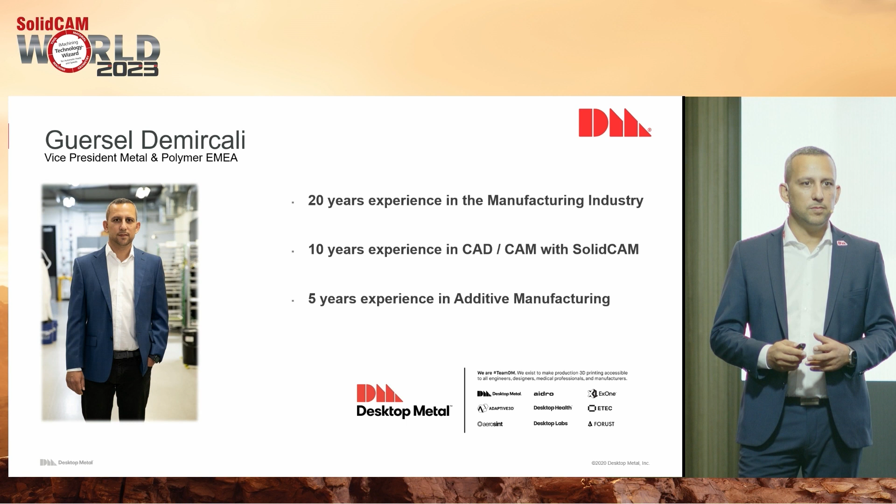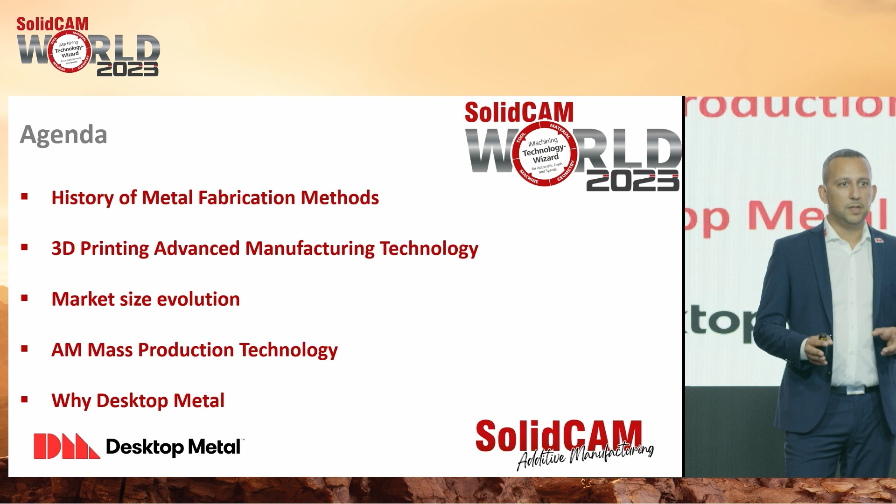We will talk today in my agenda about the history of metal fabrication methods. We will talk about 3D printing, advanced manufacturing technologies, and market size evolution. AM mass production is a big question mark in the market for a long, long time, and we will discuss it today. I will explain the differences we made with the new technologies of today, and why Desktop Metal - why you should choose Desktop Metal.

Let's have a look at the history, because history always tells us what happened in the past, where we are driving, and what has changed. If we look at the traditional manufacturing methods we've been using all these years, you see they stay pretty stable, and there are some similarities.

So we have the extrusion market, stamping, powder metallurgy, forging, casting, and CNC. And in the little lines below, you can see the age of these technologies. Almost all of them - the youngest one is CNC - but most of them are more than 1,000 years old. And that doesn't change.

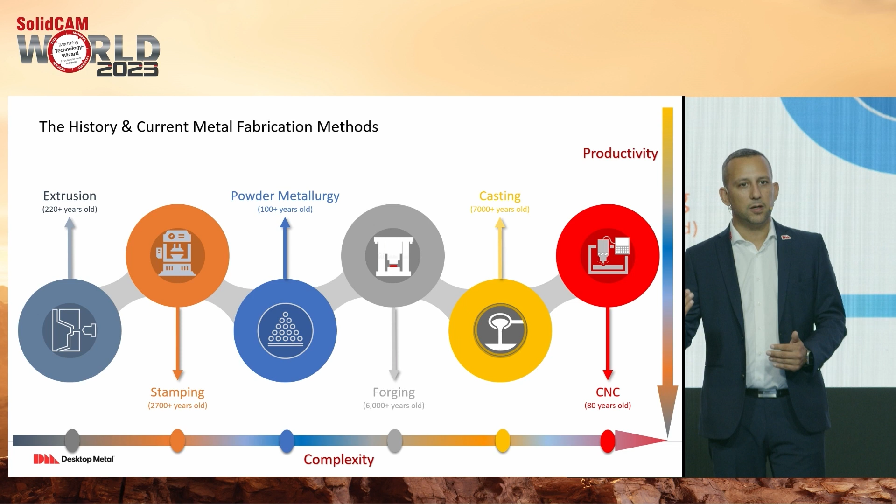The complexity defines the productivity. When you look at the complexity of your part, if it's increasing, then the productivity goes down. And there is the big question: how can we get a better effect or more output?

So a quick shout to the revolutions of industry. We had the fourth revolution, but how did we start? We had the steam technologies in the 1780s. We started to have the first mass production in 1870. And if you read these lines, you can see that every 100 years, we see a change in the industry and we get a new revolution.

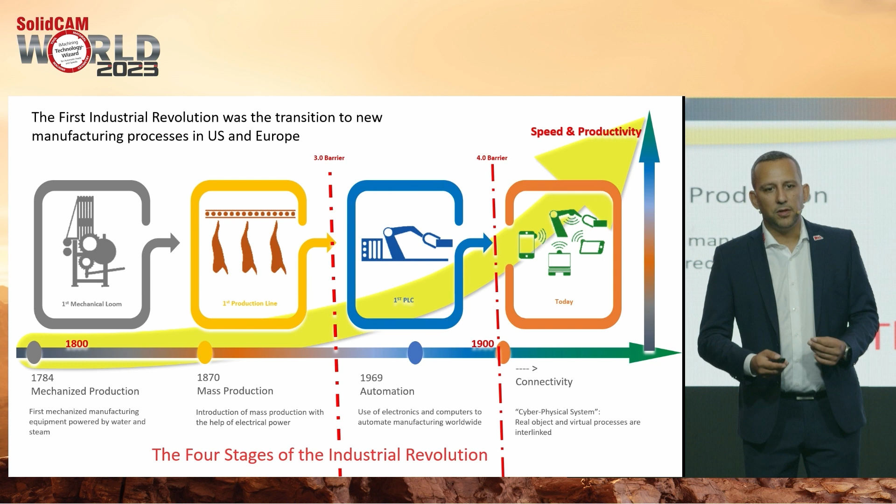Automation came in the 1970s. And today we talk all about connectivity - also private, by the way. Everybody's connected to everything, and the machines need to be connected too. So connectivity is the key in the future to fulfill the new revolution method of manufacturing.

3D printing is one of the advanced manufacturing technologies, and it is in the news every day. Why, and why was it not that successful? Why do we have different styles of machines? We will talk about some of the technologies later, but if you look at the first name of 3D printing or additive manufacturing today, it was rapid prototyping.

Rapid prototyping, because the quality of the part you could produce never fit an end-use part. You couldn't use it for fixtures or tooling. You couldn't use it for an end-use customer part because it wasn't certified and it was a weak part, almost plastic. We started with FDM and had all these technologies around until we hit the first mold and tooling.

Fixtures, we can also add to that. But the amount of parts you could produce with such a printer meant high cost investment, and at the end, low output. Not everybody could spend the money, and it doesn't make sense, because the bigger market in this world is mass production. You need to have a certain volume.

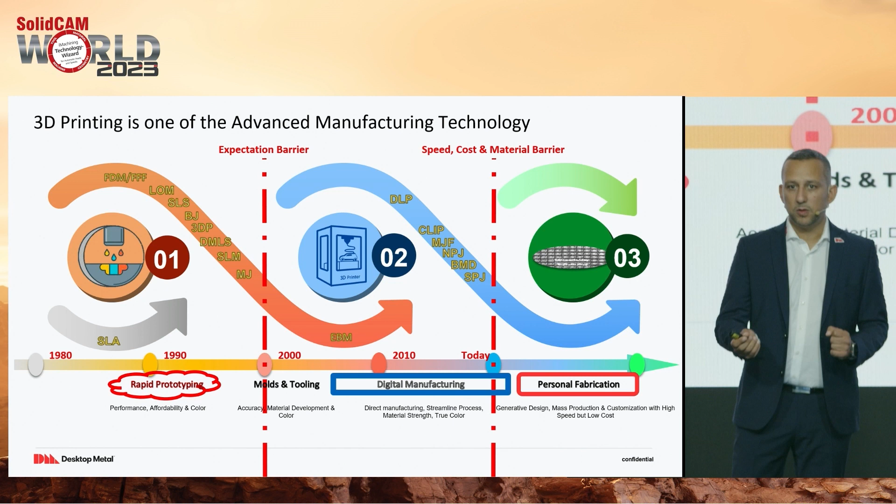After arriving at digital manufacturing, which was end-use - yeah, it was possible, but not in the right amount. So it was not for commercial use. Personal fabrication is now where we've arrived with the new technologies we can use. And I will explain today, step by step, what the difference is.

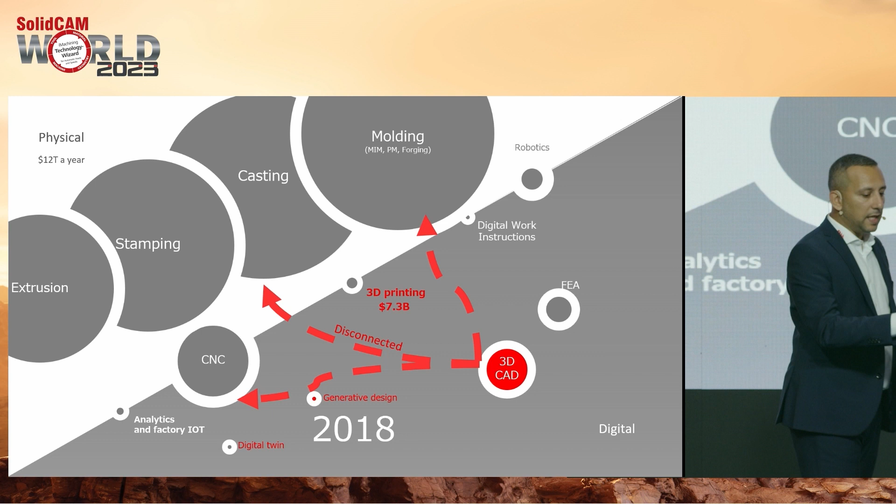And there's a little dot - 3D printing, 7.3 billion, 2018. It was one of the smallest dots here. And you see also generative design. I mean, if you watch the news today, you see a new motorcycle, you see crazy parts on it, always generative designed, very crazy structures. That is the future. Why do you see it today? Because that will be the future products.

The reason for using these technologies is the design, and you design for those technologies. Design defines the creativity, market, sustainability. But on the other side, you need to create also the right production method. Production method cares about the cost, quantity, and lead time. There is little freedom, but if you can hit the right technology, then you can fulfill both sides and have maximum freedom. Everybody wants to have maximum freedom. Like with SolidCAM, you can program any part. You don't want to have different software.

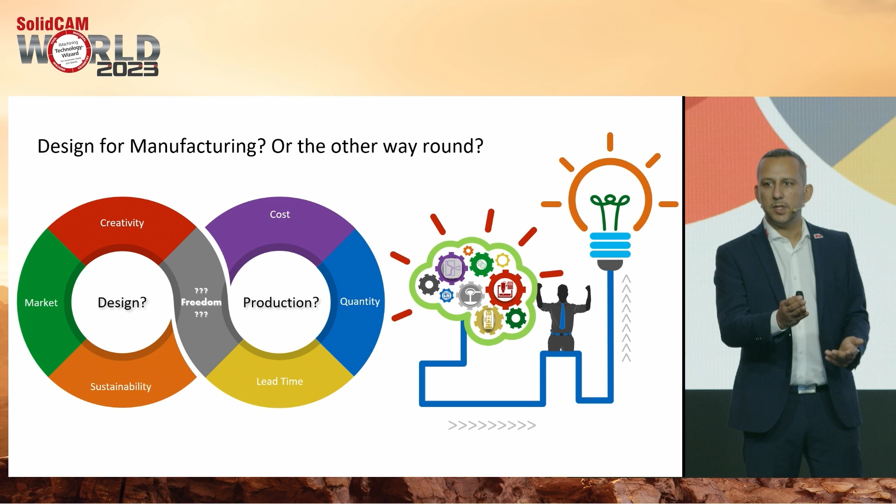When we look to the 2030 market in the future, we will see a big change. All these traditional manufacturing methods will go down. They will not disappear, they will just go down from the market size, and CNC will grow. One of the biggest reasons CNC will grow is the 3D printing market, because we can't hit the speed and a certain level of accuracy on the 3D printing side, and CNC becomes more relevant because the amount of work you do by a part is really limited. The best advantage of a CNC machine is bringing accuracy to the part, having the final finish.

Also these days we see the digital twin and generative design market growing in the same amount as we can grow. This partnership between Desktop Metal and SolidCAM started for this reason.

If you look back, the biggest exhibition in the 3D printing market is Formnext. It's one or two halls in Frankfurt. If you compare this to our favorite AMB or EMO, it's a much different size.

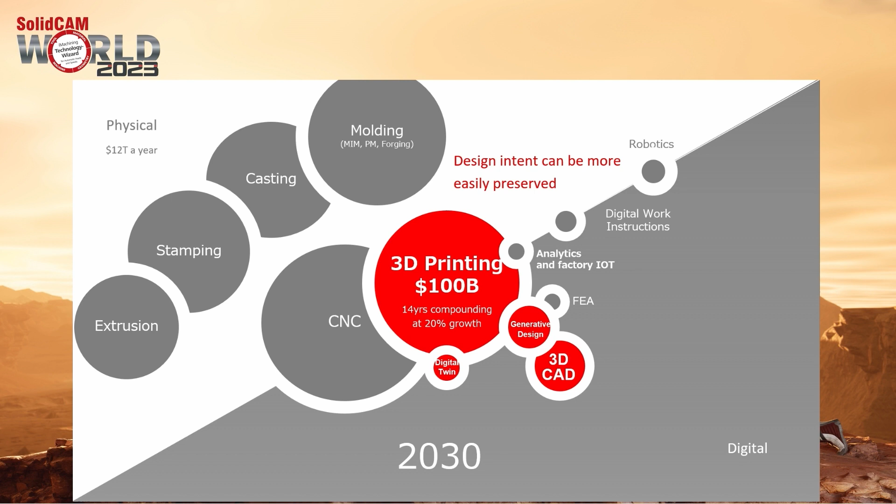When I went to my first Formnext exhibition, I saw people there coming from different markets trying to explain to me how to produce a part, coming from a CAM system and working already on machines. I couldn't understand, how can you teach me? The first three questions, he couldn't answer any.

I think the combination of CAM, CNC, and 3D is the right area where we can understand what the customer needs and we can deliver the right solution for them. Because we know, and we would never say you can just print and use it. We will always say if the accuracy allows and it's in the specs. If not, you need to CNC it.

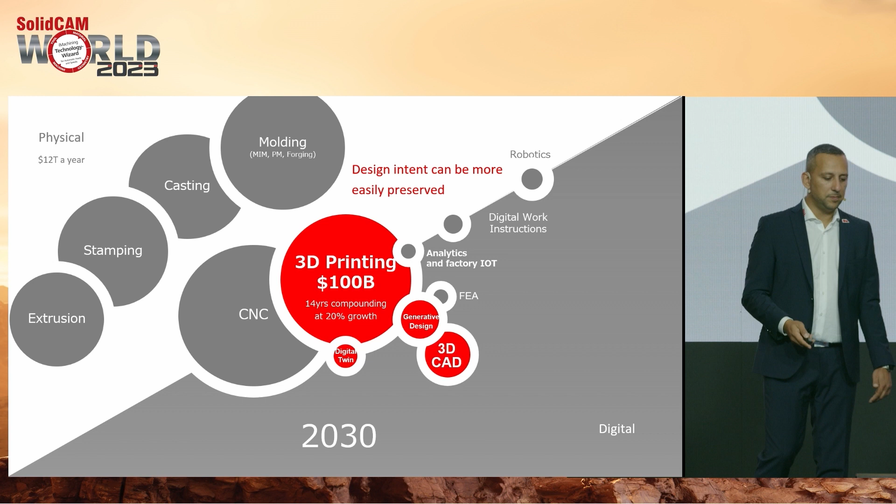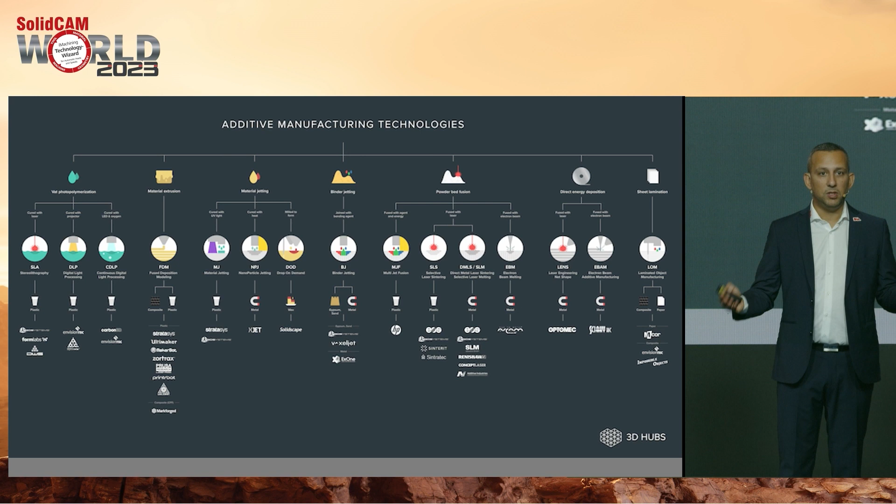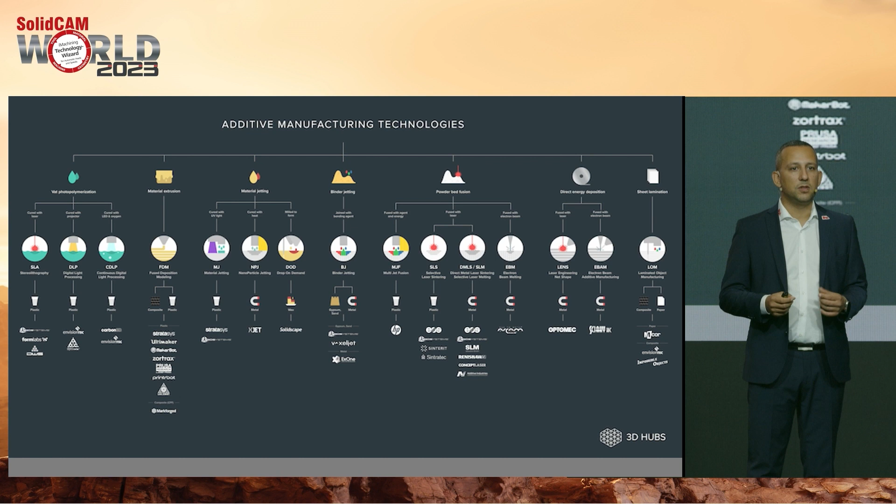When we look to the additive market, you see a lot of technologies, and I can totally understand that most people say that's too much, that's really too much. You have so many variants, and what are they doing? What is the difference? I can tell you one thing: 95% of all these technologies are always focused on a single part or low volume production, because the technology is not ready to do more, or the amount of costs you need to invest is too high at the end.

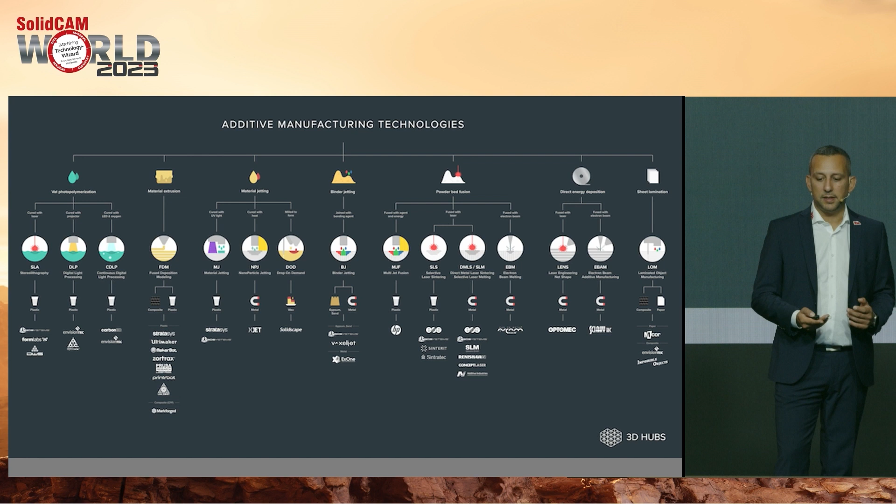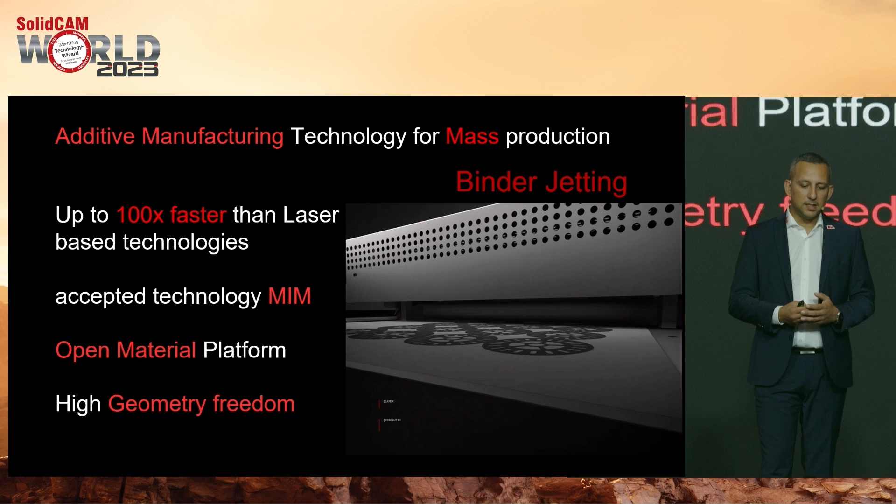The additive manufacturing technology able to do mass production is binder jetting. We are not reinventing the wheel. It's nothing different than metal injection molding. Instead of pressing some powder into a form, into a mold, we are just adding some liquids to a powder and shaping the part, then sintering it afterwards.

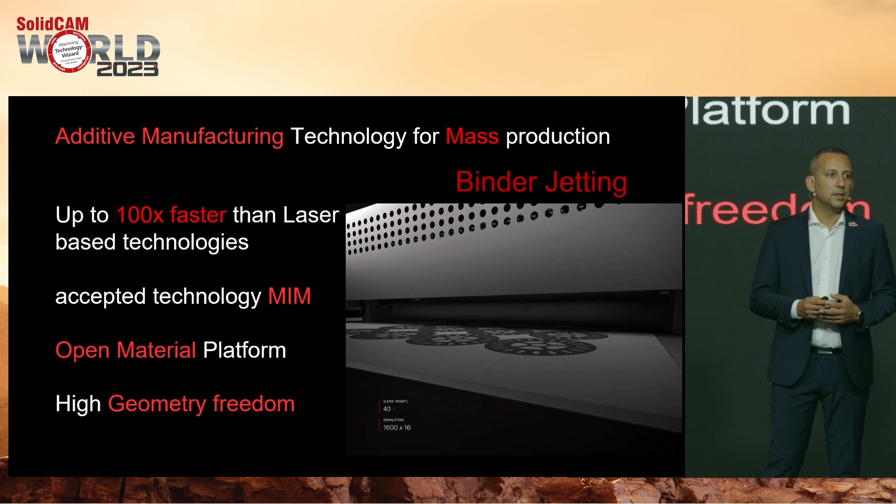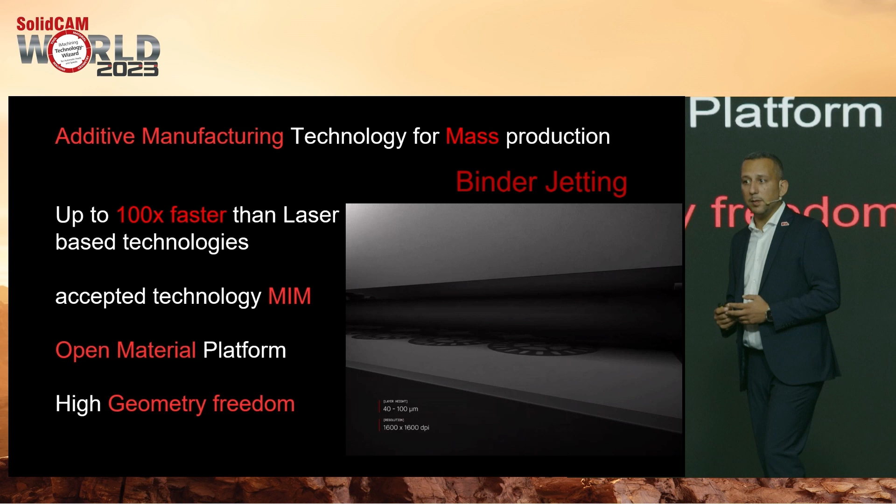Binder jetting is up to 100 times faster than the existing laser-based solutions. This is not just a marketing thing. The fastest machine Desktop Metal offers today is, in real terms, 100 times faster. The shop system we are talking about is 10 times faster. We can print 800 cc per hour. Let's talk about the details later.

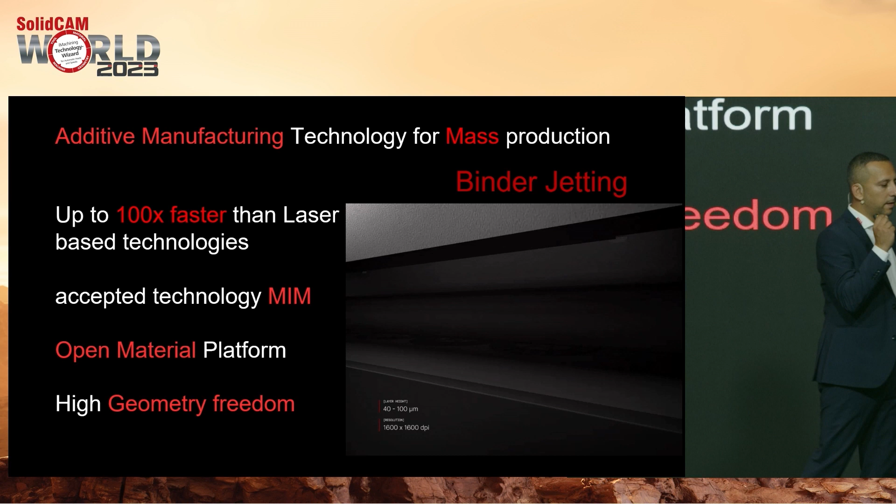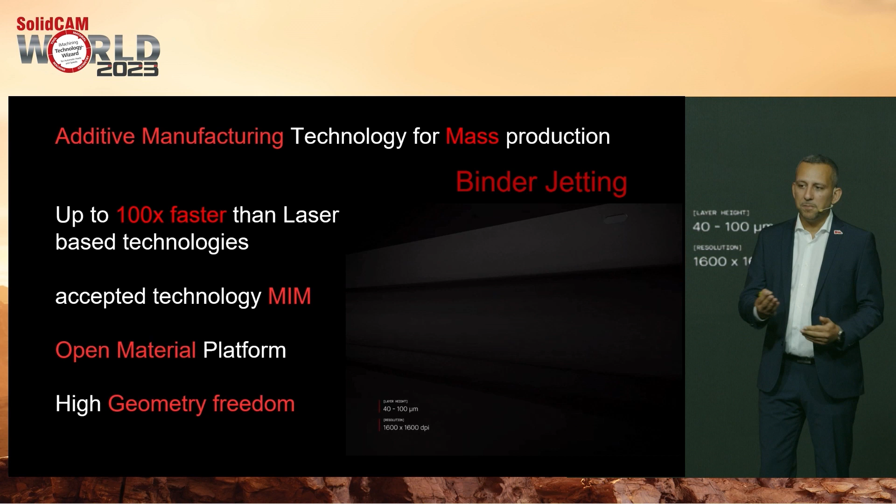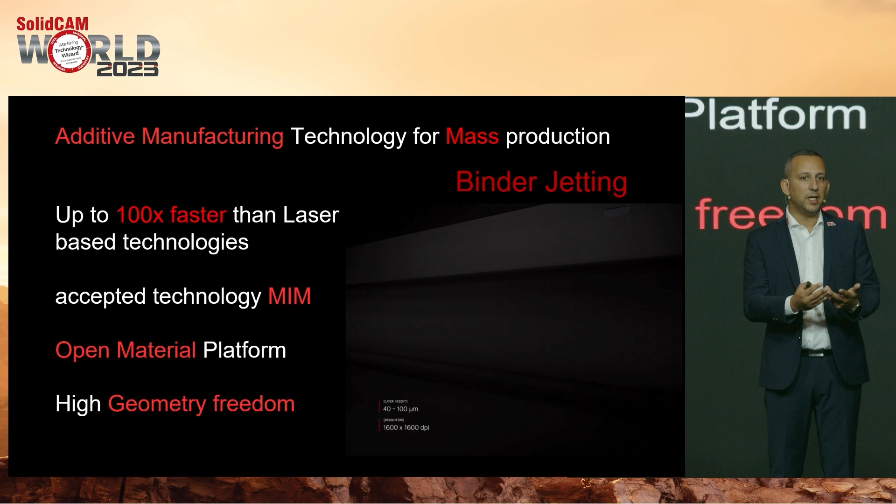It is an accepted technology. That is the big cracking point on this. If you print a part, who's going to certify this technology for your end-use part? That is really a hard game, and it's one of the biggest challenges in this market, because you can't really tell what is this, it is printed, but what is the density and all of that, and is there a certification for it? MIM is a certified process, and we have the certification for this. So the part you deliver to a customer is from a traditional manufacturing method, but it has been done differently. That is the big difference.

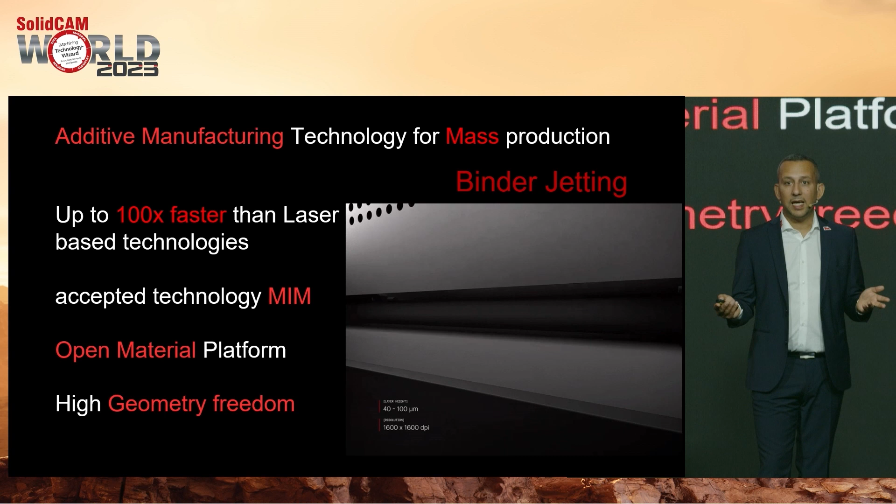Open material platform: if you add a liquid just to a powder, you can use any powder on different machines, different environments, but in general, it's an open material platform. High geometry freedom, of course, as well. We are talking today about additive manufacturing 2.0, and we expect this market growing from 12 billion in 2020 to 146 billion in the next years.

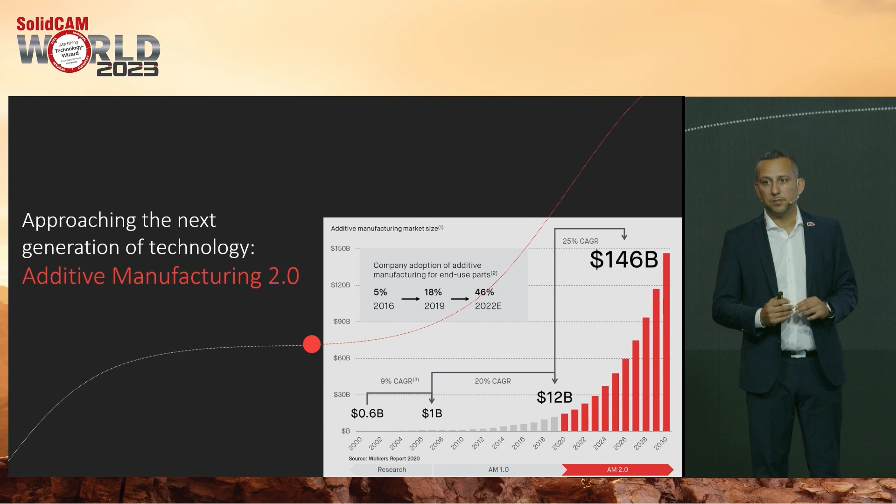Does only Desktop Metal do binder jetting? No, of course not. There are many companies doing and trying to focus on this technology because it's the only one that can deliver this fast machining. But on Desktop Metal, we need to admit, we invented this technology. We were the first ones, 6 years ago, to deliver the first machine. We have the biggest install base worldwide in binder jetting, by far, and the most certified materials, which is important to hit customer expectations on materials.

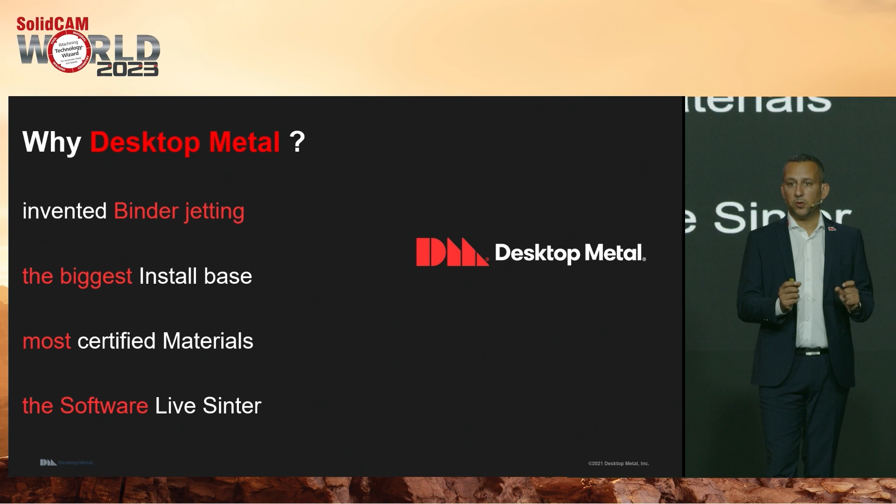And the software Live Sinter. Now we come to the most important point. Live Sinter simulates your sintering process. Even the MIM industry and the casting industry don't have a solution to really exactly simulate your sintering process. The parts shrink and change while sintering, and you need to predefine and predeform your part to get the right result at the end. That is the game changer on Desktop Metal's side.

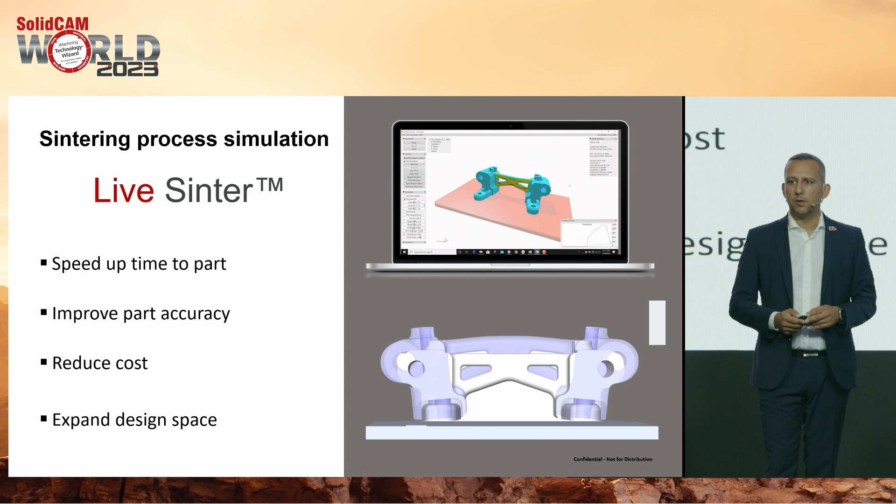Live Sinter, how can we compare that to a product on SolidCAM's side? I found one - it makes total sense to compare this with iMachining and the technology wizard. Not only is iMachining one of the best technologies to cut a part at the fastest speed, but the ease of use helps the customer use that technology daily. Not everybody sits in front of a computer trying to get the fastest part in the world with iMachining - sometimes they just use it because they can cut their part really easily. They just click the buttons, run for it, select maybe a level 1 or 2 in the safety area, and get the result.

The same happens with Live Sinter as well. In Live Sinter, you can pre-simulate, press the button, and not worry about the accuracy afterwards, because Live Sinter is doing that for you.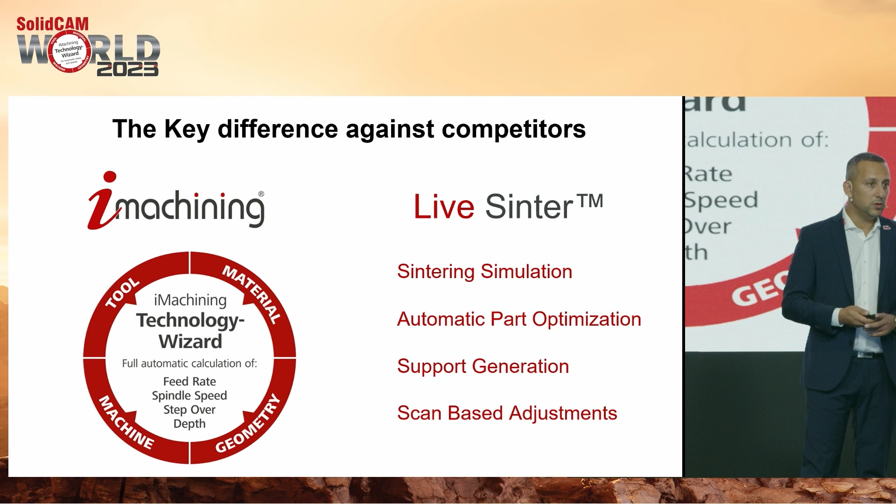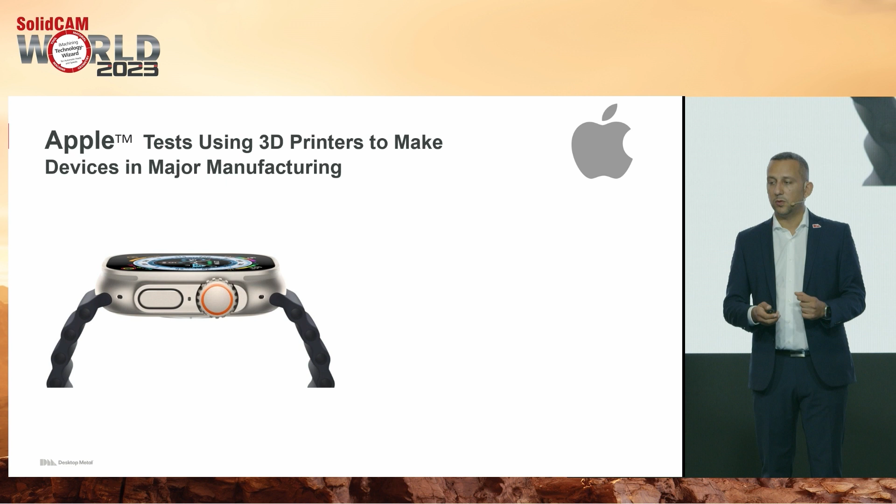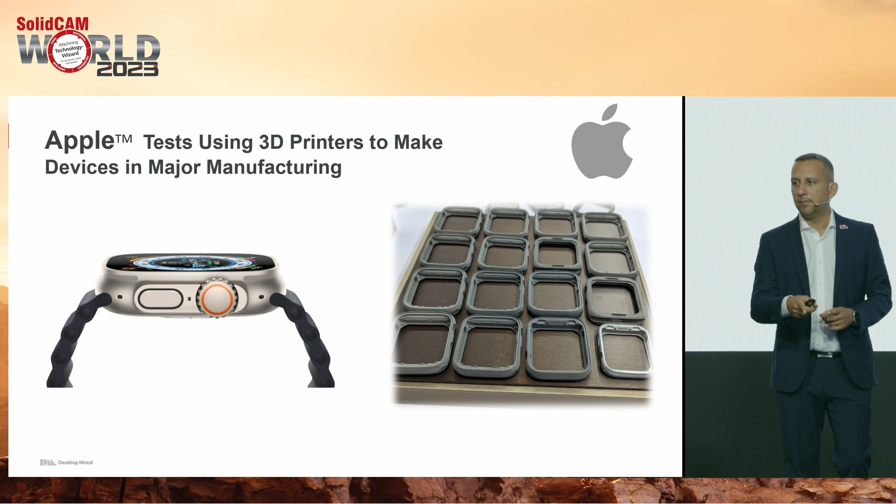One big new thing, again, Apple. Apple is testing using 3D printers for their major manufacturing shift. If you look at the part shape, it totally makes sense - you could just print the case, and afterwards there's of course some machining. In the first pictures you can find on Google, that is basically binder jetting. The parts are 20% bigger on the left side, and in the right down corner you see the part shrink down to its real size. If you look at the accuracy, you know there was also CNC inside. The selected technology in this case is binder jetting because of the speed, the amount of parts you can print, and the ease of use.

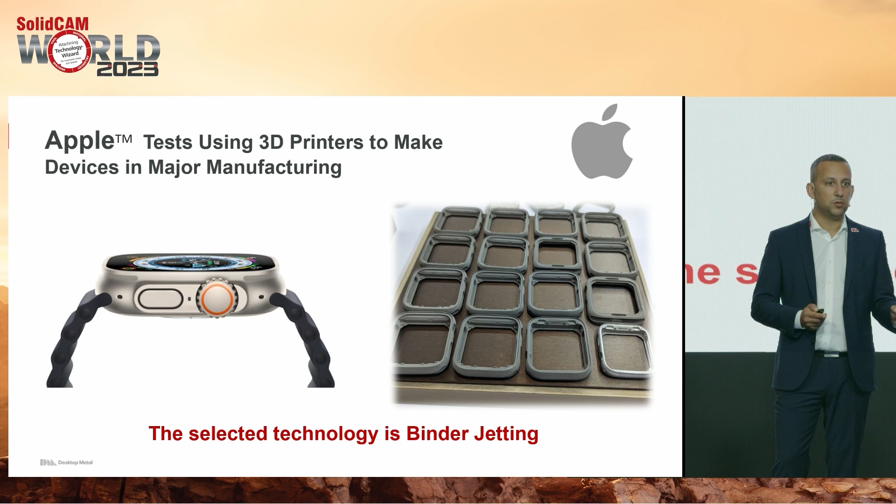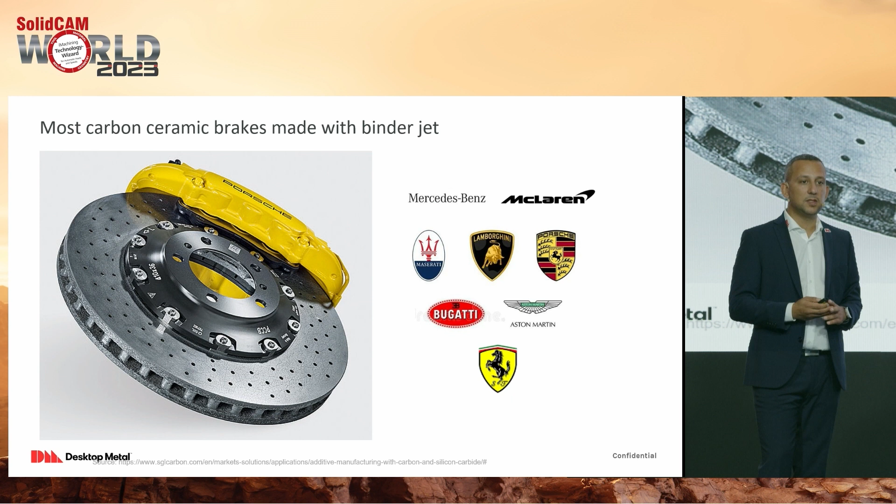From a different angle, most carbon ceramic brakes are made with binder jetting. There are variants of parts we could show, but at the end, the market is starting to accept this technology, and the speed of those makes sense for it.

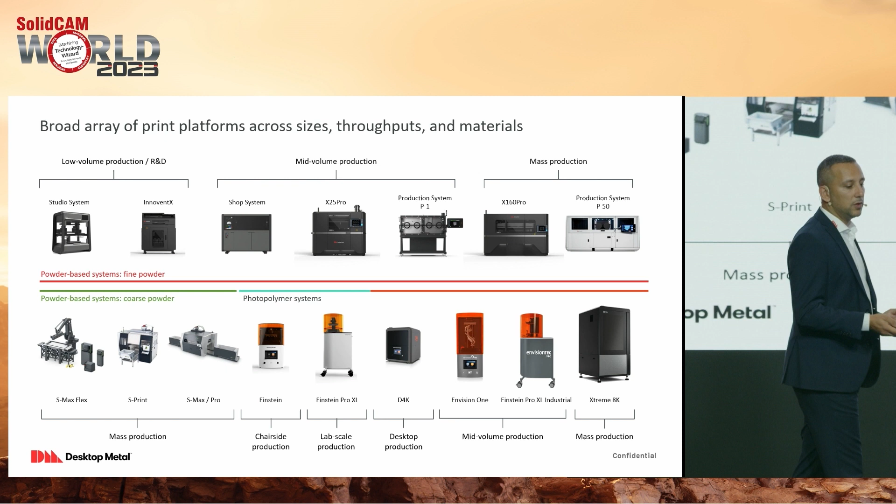So there are a lot of products, and I think Jörg explained the most suited ones for the CAD/CAM industry, but there's definitely much more than that. If anybody has a question, go to Michael, Jörg, or me today, or later, to really talk about the variants of technologies. And the growing customer base, of course - we have variants of customers really investing in this technology because the future will be that.